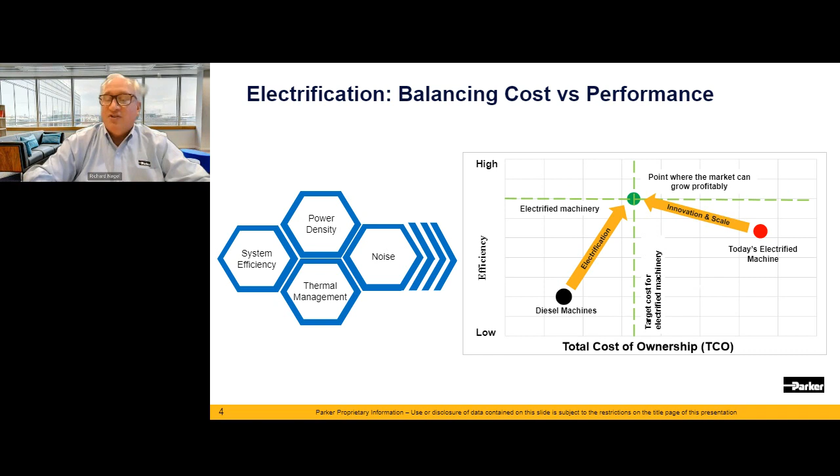And so one thing you'll find with these integrated products, they do require a certain amount of scale. They're not piecemeal like typical hydraulic systems where you can take out a valve and put in another one. They are a little bit more on the automotive side where you require a certain level of scale to get the cost down. But that's where we're going to have to go as an industry to make this equation work.

So when we talk about fluid power technologies, for the folks here who have a hydraulic background, I think we have a pretty good understanding about the potentials and benefits of fluid power technology. In electrification specifically, we are helping to support carbon-free, carbon-reduced policies, local and regional emission regulations, which of course vary all over the world and all over North America. We're seeing lower noise regulations, especially in big cities and driven by municipalities. And once again, a requirement for smaller, faster, and more efficient hydraulic products and electromechanical products that are part of the overall system.

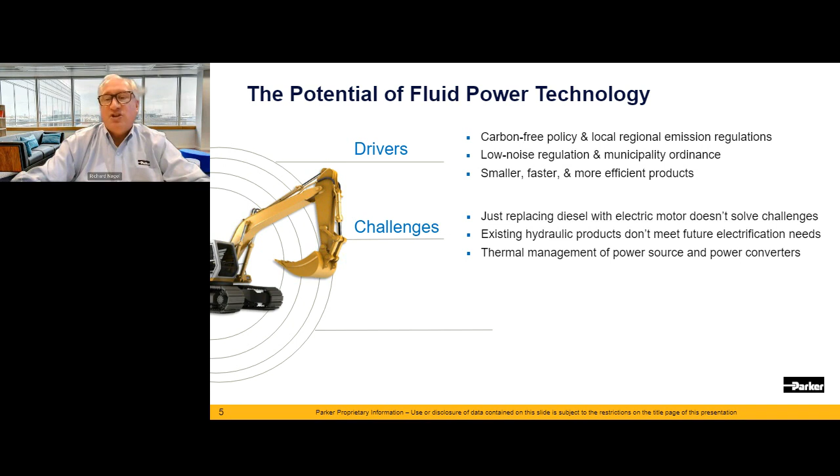Of course, some of the challenges, we like to tell people all the time, just getting rid of the diesel engine and replacing it with an electric motor doesn't solve all the challenges. It creates some different challenges, and we'll talk a little bit about that. A lot of our existing hydraulic products that have worked just fine for years in traditional mobile environments are not going to work or be ideal for future electrification. We'll talk a little bit about that. And then once again, the thermal management of the systems and reducing inefficiencies is key.

And then lastly, some of the potentials. So this opens up really the design playbook for higher speed, more power dense hydraulic products that utilize new designs and absolutely more automation on the manufacturing side. Modular integrated products that are more cost effective with manufacturing scale. So that's the supply chain and the automation assembly process. And then of course, digital, right? That just permeates everything we do today.

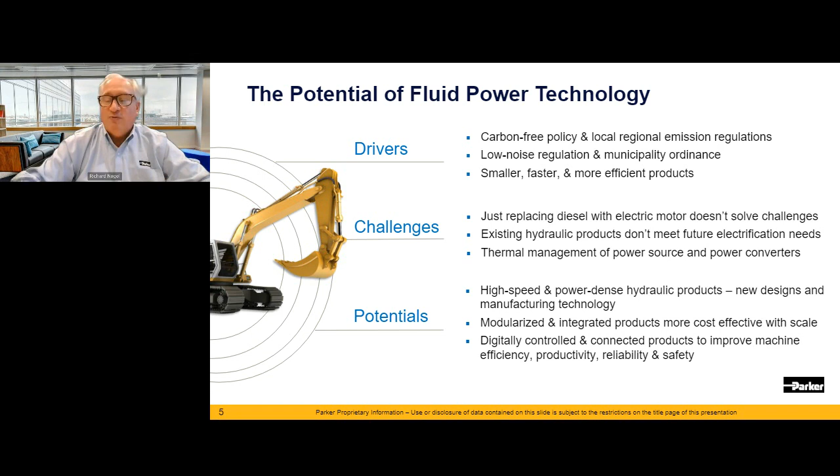Having connected products, how does that improve efficiency, productivity, and of course, very importantly, safety. So we won't talk a lot about safety, but that's kind of the underpinning of a lot of what we do for electrification with hydraulics.

So why electrification? Why now? Big hot button topic for a couple of years. Anybody who's been to ConExpo or BAUMA, you see electrification everywhere. Shows are sold out, ACT shows. So, number one driver, we have customer demands. And at the end of the day, we have to provide reliable solutions for fleets and municipalities so they can make money, because ultimately they have to operate this equipment in a way that is profitable long-term.

The other customer demands are extended battery operation. We're not battery people, but we produce the products that consume a lot of the power from the battery. So it's important that we have efficient products. Charging infrastructure in remote locations, construction sites, that's a huge customer demand, kind of beyond the scope of what we're talking about here. And of course, there's just changing attitudes about EVs, both good and bad, as people become more experienced, see what they can do and see what they can't do.

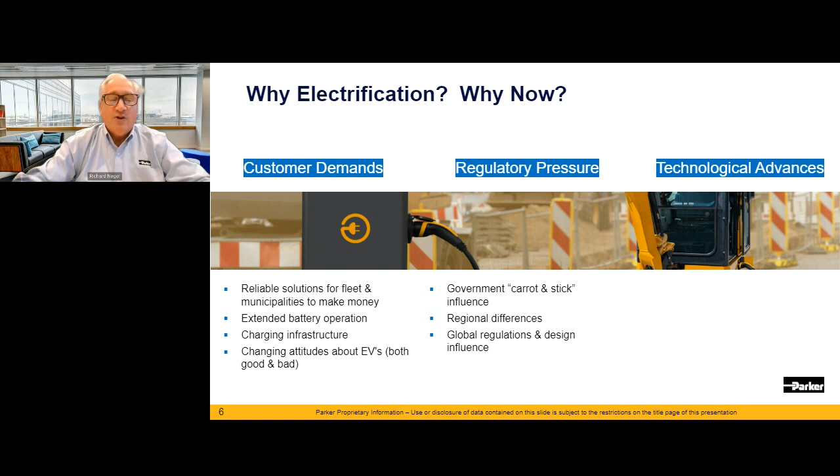Of course, on the regulatory side, we have a lot of government carrot and stick programs, right? Incentives and disincentives. We see a lot of regional differences, state to state. And then, of course, globally, as our industries are very global at this point, we see a lot of direction from Asia, Europe, that find their way to North America, and we're trying to find a place of equilibrium.

And then technologically, a lot of it is in the electronic side and controls. Power electronics become denser, higher voltages, higher current capacities, a lot more computing power everywhere, connectivity and data, IoT cloud solutions, autonomous operations, which is kind of beyond our scope, but part of electrification. The IoT solutions with over-the-air software, right? So that we can not only pull information, but push, and just more by-wire solutions, whether that's just operating a boom, a brake system, or a steering system. We're seeing more and more decoupling from cables and just pumps and valves, but using control systems.

So, some of our challenges for hydraulic systems are pretty clear. I wouldn't say the number one, but maybe one of the top issues we see here is our pumps today were designed for traditional diesel applications or power takeoffs or industrial, and RPMs were not the problem. Generally, we could go up to 2,500 or maybe 3,500, and that was fine for most hydraulic system engineers. But when you look at the motors that we have available today for electrification, they're operating in the sweet spot of 8,000 RPM and higher. And so we have a mismatch.

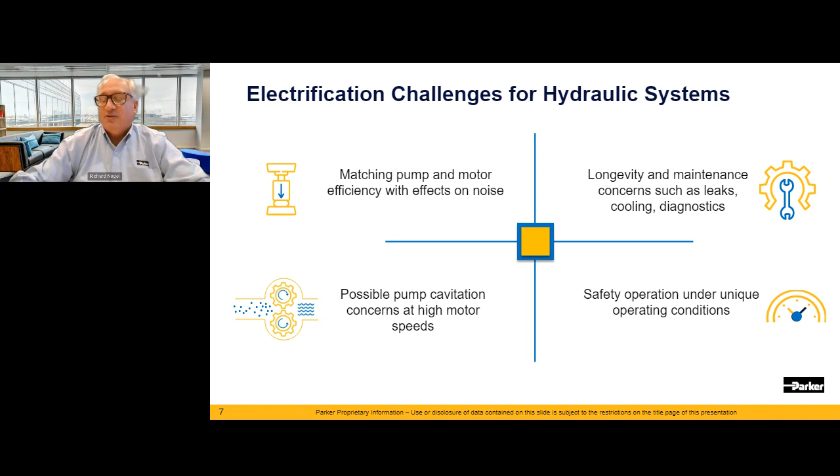And of course, longevity, the way we operate pumps in electrified systems is different than we see in diesel. So there are longevity concerns. And of course, all the normal hydraulic concerns, leaks, cooling, getting good diagnostics. Another side of this is, when we run the pump at higher speeds, we have to be concerned with cavitation and inlet conditions. And then we have a lot of unique conditions in electrification governed by a lot of different ISO requirements, but also good hydraulic practice. So safety is always paramount in system design.

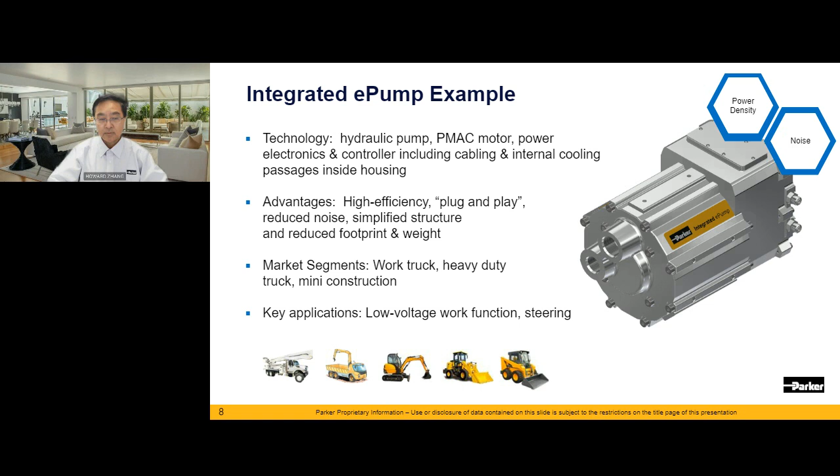So what is the integrated ePump and how has it been put together? You can see from this picture, on the left-hand side are the inverters or controllers. In the middle is actually the motor. The motor basically has the key components: the rotor, stator, and housing. On the right-hand side, it's actually a fully integrated hydraulic pump. And it can be different pumps there actually. So that's the structure.

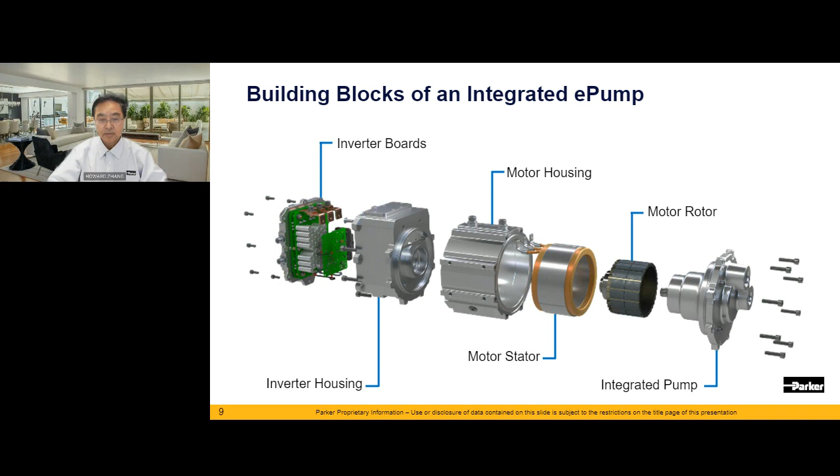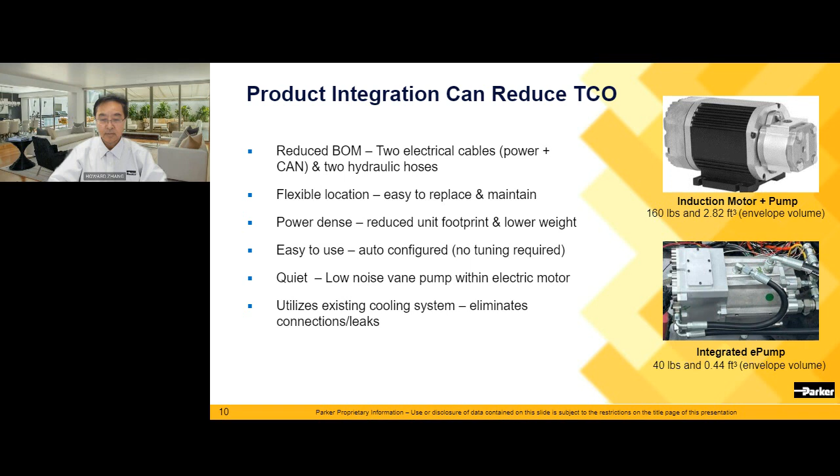And the other major benefit for the OEM is flexibility. They can put this thing anywhere they want, rather than just on a particular space with special mounting. And also, it's actually easy to use. It's auto-configured and auto-tuned, so no tuning is required on site. And if you design it properly, it's actually quiet. We proved that can be done. It's actually quieter than when you bolt this big motor and the pump together. So that's the simple benefit.

And the other part we're going to talk about is the mismatch Rich just mentioned between the hydraulic pump and the electrical motor. You can see from this graph, the vertical axis is input torque, or pressure in hydraulic terms, and the horizontal axis is the operating speed. For a normal existing hydraulic pump, the peak efficiency region in this example is between 1200 RPM and 2700 RPM. And the efficiency is pretty good in terms of a hydraulic pump.

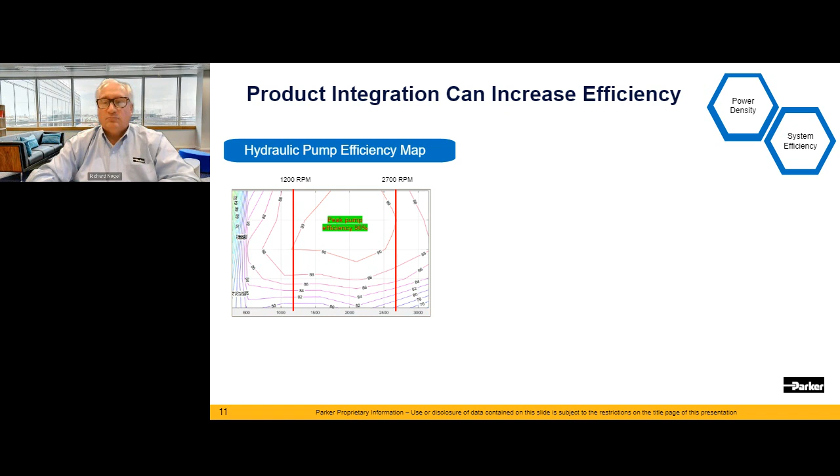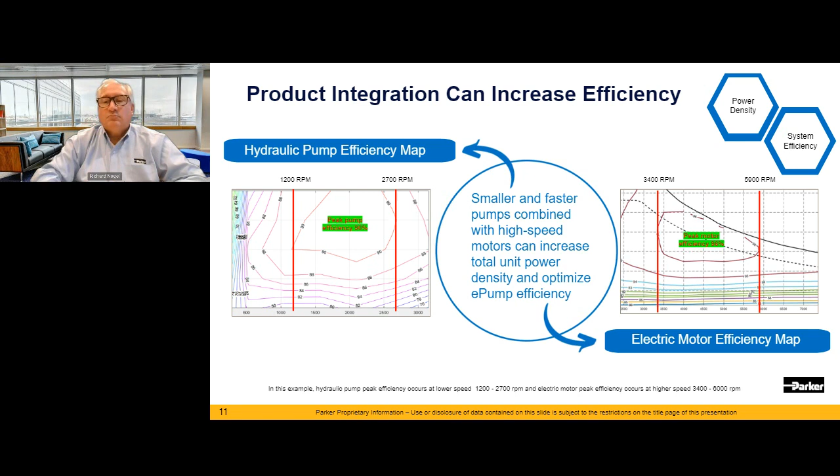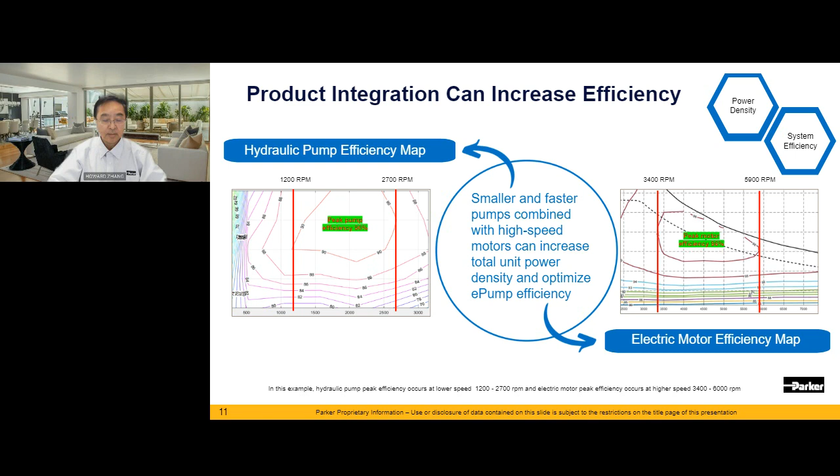However, if you look at the electrical motor on the right-hand side, the most efficient operating range is actually double or more, beyond the hydraulic pump operating range. This one is 3,400 RPM to almost 6,000 RPM. So there's a mismatch. To solve that, a smaller and faster pump technology needs to be combined with this high-speed electric motor, which can definitely increase the total unit power density. And at the same time, if you move the efficiency range of the pump towards higher speed, you can optimize the ePump efficiency. So that's another benefit.

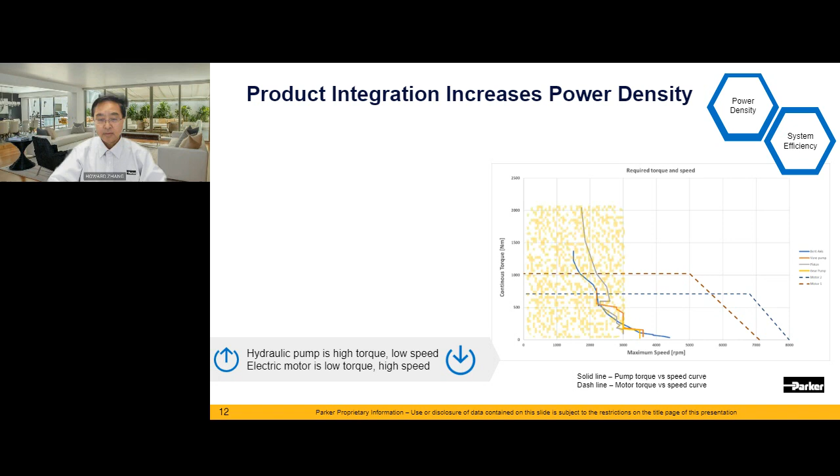This can be further illustrated by this generic graph. The solid line is the hydraulic pump. The vertical axis is continuous torque or hydraulic pressure, and the horizontal axis is speed. Hydraulic pumps have very high torque, but their operating speed range is low, in this case 3,000 RPM or less. But it's a different story for the electrical motor. Their most efficient point is beyond 3,000, from 4,000 to 6,000, as the last example showed. And they can run at much higher speed.

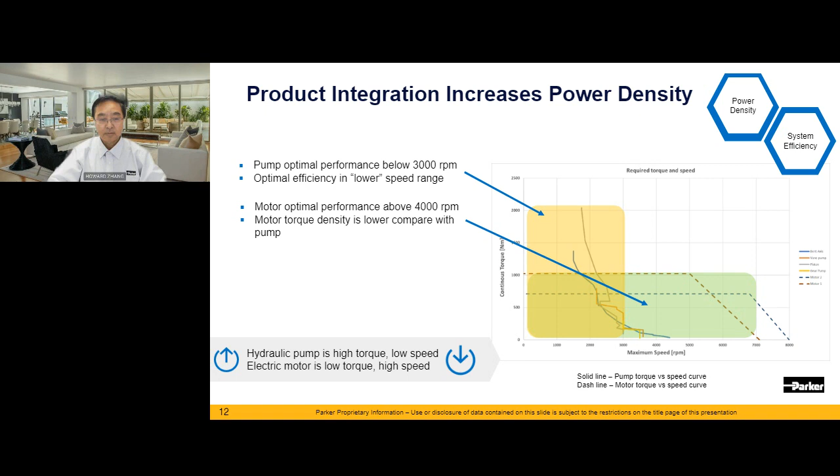So to match the hydraulic pump with a motor, we need to do something. One is to use a smaller and faster pump and integrate it with the motor to increase the power density. And if you do that right, it also increases the efficiency. The other, people can say, okay, you can use a gear. Sure, you can, but with added inefficiency and also cost.

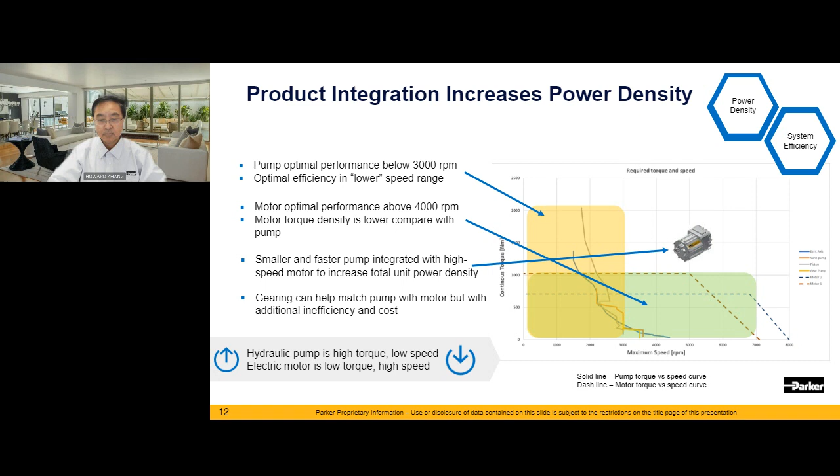So we talked about how we can increase the power density of this ePump and what that will do to the efficiency of the total unit. And to improve efficiency of the system, reduce the battery size or make the battery run longer, improvement on the component only will not do the job. We need to take the total system point of view.

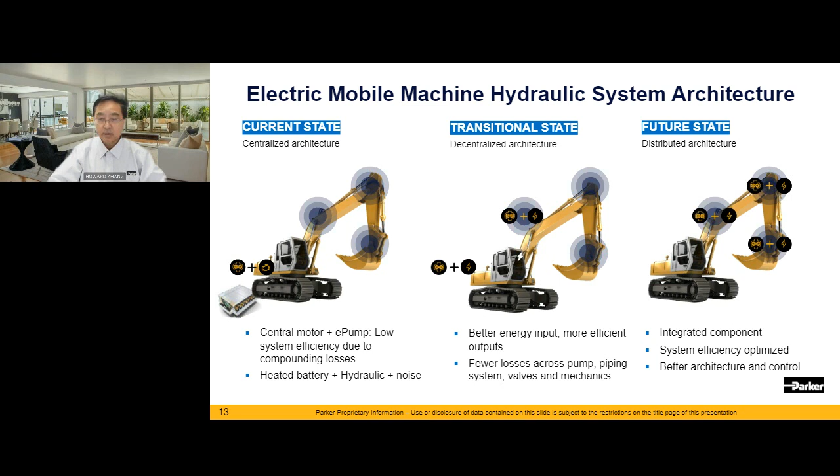As we see, the centralized system architecture is you have a battery, and the battery has power. You have an inverter and the electrical motor. A big electrical motor drives a single pump. In this case, I actually use a gear pump as an example because your motor can vary speed, varying the flow, but you can also use a variable pump here. I just use the fixed pump as an example.

But the speed of the actuation or implement is regulated by the centralized valve. They call it a valve bank. And the good part is you can maintain all the hydraulic portion untouched. So that's a good part. But from this top picture, you can see it's very inefficient. You have 55% valve loss of the total; 55% of the input power is lost or wasted by the valve throttling.

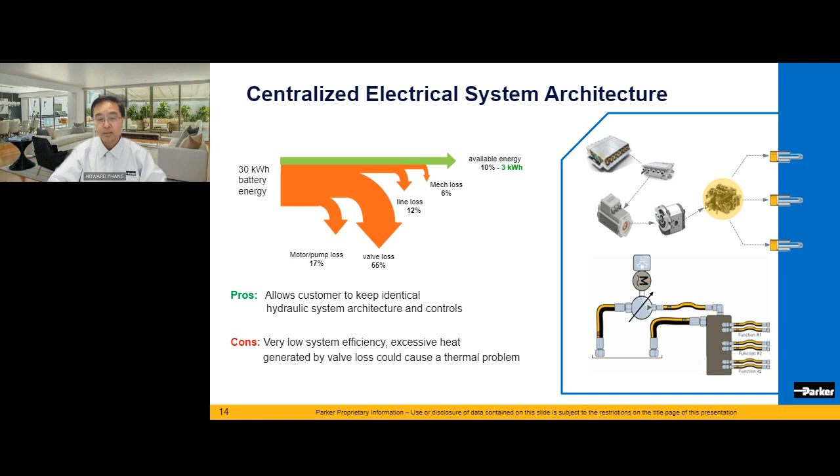And again, your motor and pump loss is also significant. You only have, in this case, 10% of your energy to do the work. So you can see the battery will have a hard time, your system will have a hard time to maintain the temperature, or they have a thermal issue.

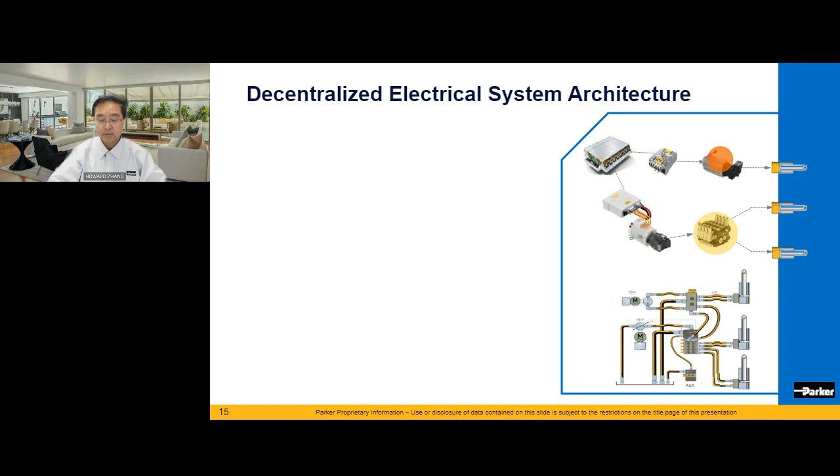And the next one is decentralized, we call that a transition state. So you can see in this system, you have a motor driving a pump. In this case, I use the variable pump. The other path is to use the pump together with the motor, a high efficiency pump and motor driving one function. So that's decentralized. And you can see the efficiency over the centralized system is actually quadrupled. It's a big difference. So by doing this, you definitely will save a lot of battery energy.

But still, you couldn't get the full benefit of this pump and motor pair. You still have a valve throttling loss, and you still have the idling loss, partial idling loss. The future system architecture, or the architecture mostly fitted for electrification, is this distributed electrical system architecture, because the pump and motor pair is very flexible, as I mentioned. You can put it anywhere.

And the benefit is you have a fully distributed system, in which you have maximized the system efficiency. The good part is you have a dedicated pump motor pair, which allows maximized system efficiency, and you have full power on demand with no throttling. So if one function does not need the power, you just basically turn it off.

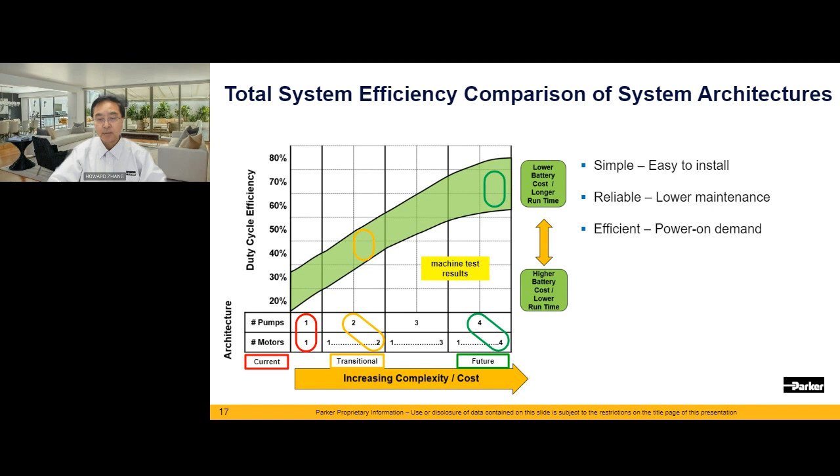So this one is actually a summary of the three system architecture comparison. You can see the red one is the centralized system. The middle, the yellow, is the decentralized, and the green is the distributed. So this is the efficiency comparison of the three. I'm not going to read the advantages of this distributed system architecture. You can see them here.

The other important part I need to mention is by doing that, you actually optimize the thermal management. And by optimizing thermal, you will have much less cooling need, and also your HVAC system can be quiet, or sometimes not used. Yeah, so that's an extra benefit.

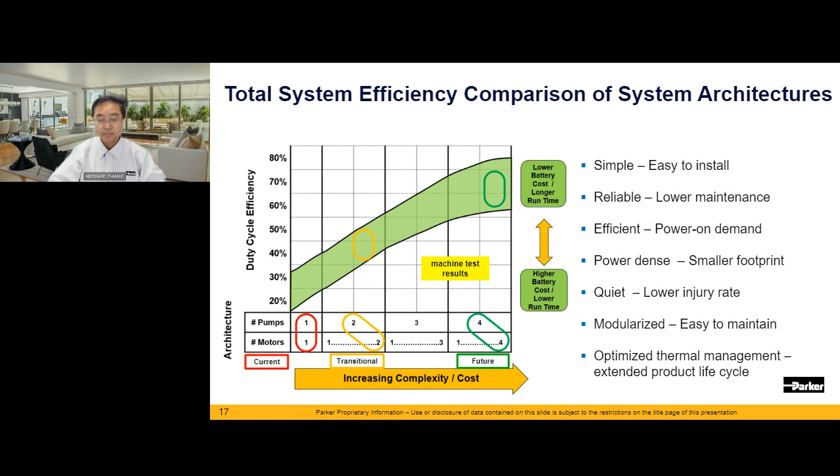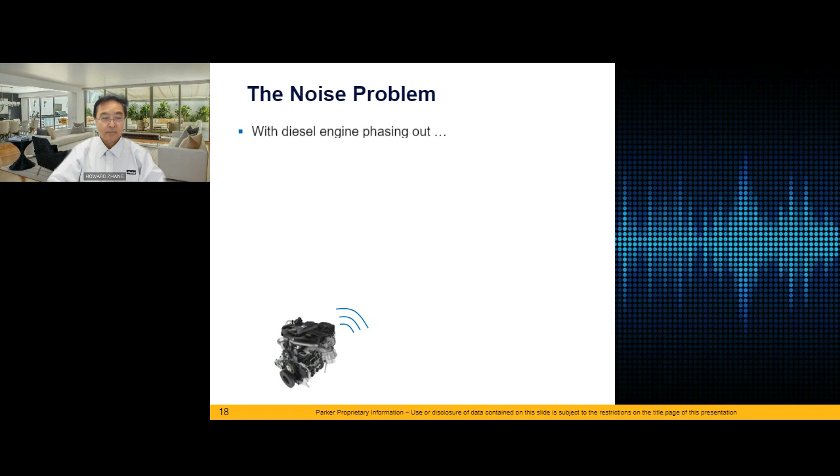So when we talk about this efficiency, how will that efficiency affect other parts of the electrification? Because the other important factor is noise. But why noise? Why do we say we have this noise issue or noise problem now, not before? It's all because you had this big boy there for a long time, and that big boy masked most, if not all, of the hydraulic noise until your diesel engine was phased out.

Now your hydraulic product, a hydraulic pump, is at the forefront of the machine operating noise. Everybody says, oh, your hydraulic pump is noisy. Why didn't they notice that before? Because there was a big engine, much noisier than the hydraulic pump. We will show that on the next page. But how important is low noise? It really depends on the market and on the application environment.

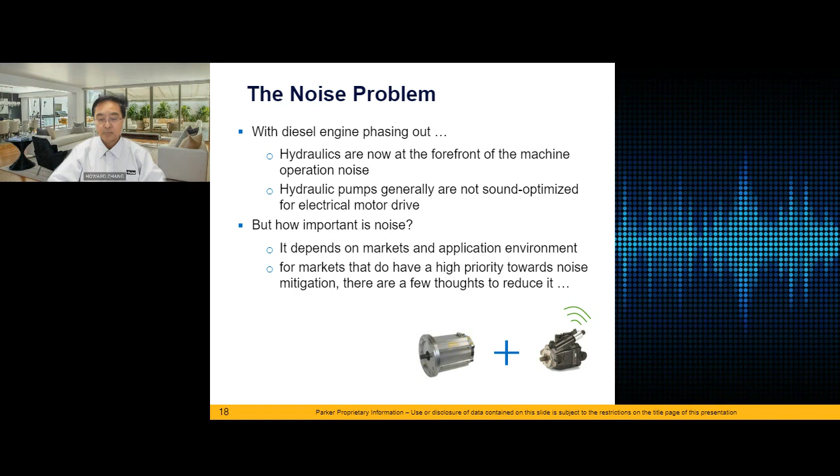For markets or applications that do have a high priority towards noise mitigation and reduction, there are a few thoughts to reduce it. So where did that noise come from? The noise actually depends on the pump technology, system technology, operating condition, and definitely the pump speed and pressure, and also the mounting, like how the pump and motor mount to the machine.

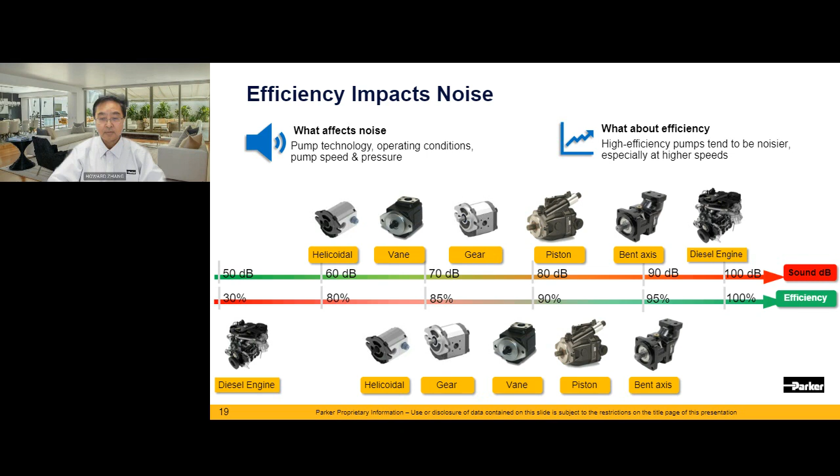All the manufacturers are actually developing new technologies to deal with the noise issue while still trying to maintain the high efficiency of a hydraulic fluid power product. There's a lot of new development going on, actually. For electrification, that's a very good thing. So then I'll hand over to Rich again.

All right. Thanks, Howard. So obviously, one of the takeaways here is not just the product concept of an integrated ePump, it's really about a distributed hydraulic system. It's not something we could do in the past, but now with the ability to have motors and drives integrated with pumps, we can actually do this and are doing this on machines. So what do we get out of these distributed systems? Obviously, efficiency is paramount with any electrified machine. We can turn this off when the function is not required, so the noise goes away, parasitic hydraulic losses go away, and we're not drawing down from the battery.

Ease of maintenance. We'll talk a little bit about data that comes out of the device, but these types of devices are not things that you necessarily try to troubleshoot and repair in the field. It typically is something that you replace, and you've got the tools to tell you what's going on based on the data. And the other outcome of being able to turn off and better efficiency is less battery drain. That's probably key, because the battery is such a huge cost here.

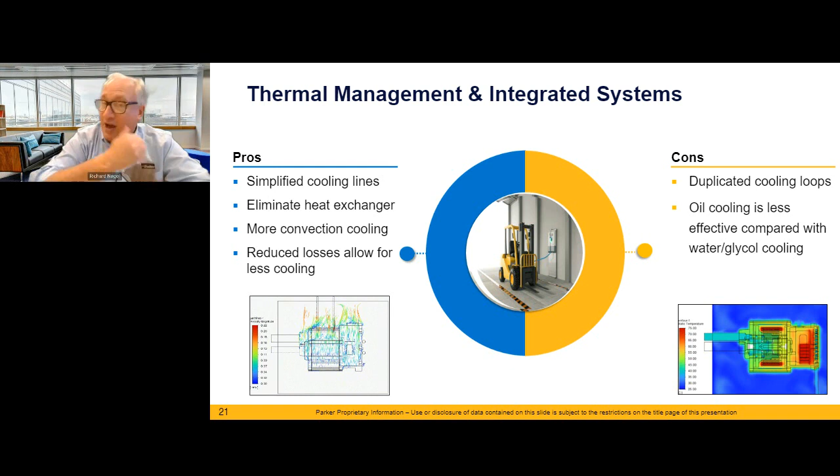The con is, with distributed products, you potentially have some duplication of cooling loops. The other thing is oil cooling is generally about 15% less efficient than water glycol. And of course, if you're going to have a battery and inverter, you're going to have a water glycol system to cool that. It's absolutely required.

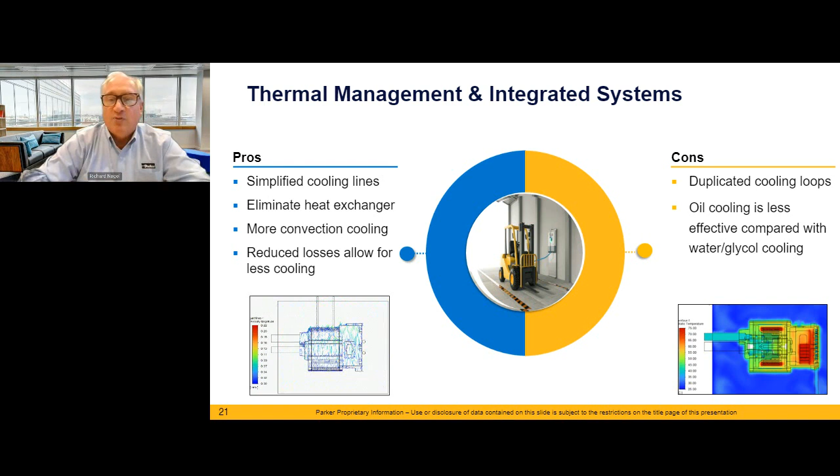Well, I mean, you can run it through hydraulics too, but typically not as efficient. So it really depends on the machine design. At the end of the day, though, having less inefficiency in the system allows you to have less cooling overall. So generally in the energy balance, it's going to be more favorable to have this type of an architecture.

So from a control standpoint, I like to tell people, when you look at these integrated products, each one of these is a node on the J1939 CAN bus. So you're getting information from the point of work. And some of the messaging that we get on the CAN, things like motor current, so you can see from motor current how much torque, and if you have a pressure sensor feeding back on the CAN, you can really start to do hydraulic horsepower versus battery power input, motor RPMs. You can start to think about RMS work, life cycles, all those things.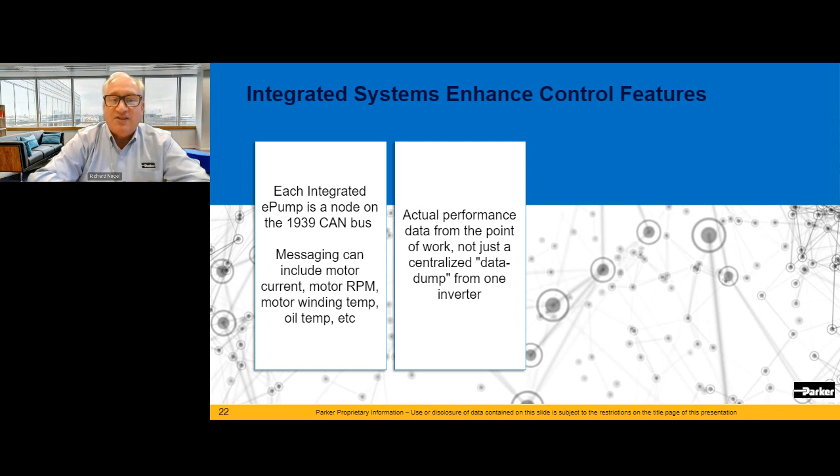We're also getting data on the motor winding temps and oil temp. So all that stuff is available on the CAN, and we can do a lot of different things with that data to help predict system health, troubleshoot, prognostics. And once again, we get performance from the point of work, not just in a traditional centralized system where we have one inverter, one motor. We actually can see what's going on at the work function. So if we have a problem at one point on the machine, we know exactly where it is. No troubleshooting is really required from that standpoint.

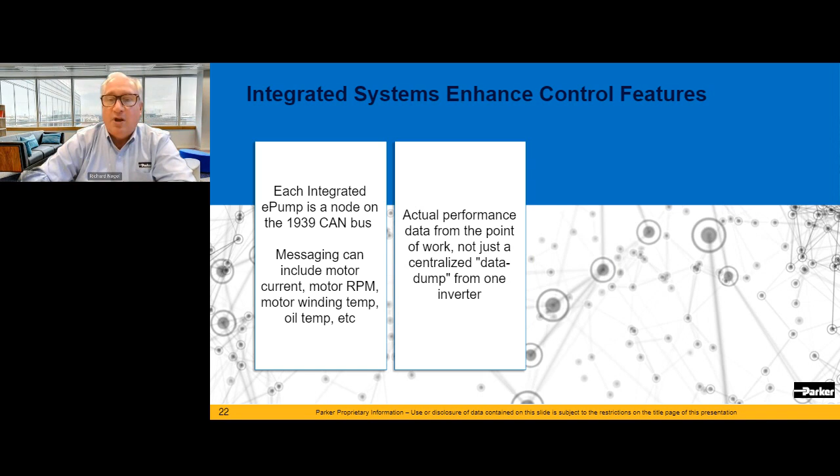Real-time data, so we don't get prognostics off the machine, but we do get good diagnostics. And so, for example, we can tell how much work is actually done versus power consumed from the battery. So in terms of optimization, we can really optimize the point of work here that we can't do with a centralized system.

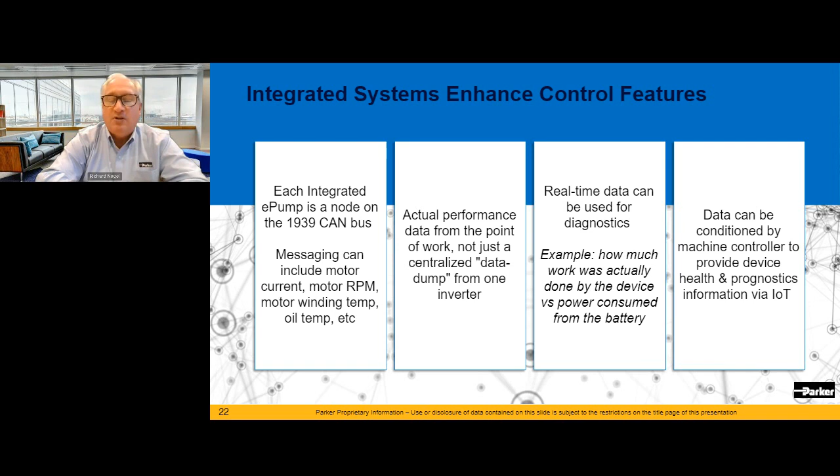And lastly, talked a little bit about IoT solutions, but when we have this much data on the bus, we can transmit that live. We can either run it through a machine controller and manipulate the data and get some real findings, or we can send that to the cloud and then pull that data down so the people actually operating the machines can look at what's going on.

I know in some cases we have IoT solutions on our electrified equipment, and we can look at any time and see how much work is being done, how efficient it is theoretically versus actual, and that data will help tell you if there's any degradation in the performance of the device. So if day one it consumes X power and provides this much work, and then a year later it's starting to diminish, we know that there's a problem with the device, probably has to be replaced in the field.

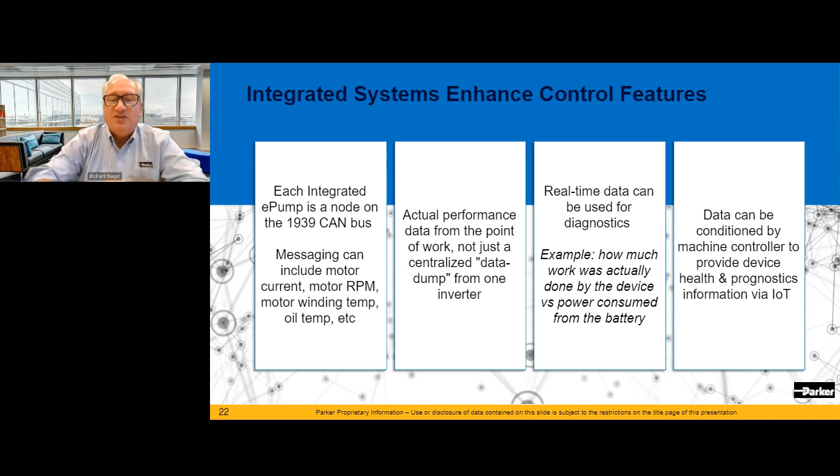So lastly, some takeaways, and then we'll have some time for Q&A. So from a market need standpoint, what we're trying to do as one of the suppliers in this industry is help develop more efficient fluid power systems that goes through from the motor to the drive, which are typically high efficiency, but any point of efficiency we can get helps. Fluid power systems, generally reducing losses through hoses, through fittings, slippage through pumps, right?

And then again, we talk about all these trade-offs. We need high efficiency pumps that can operate at higher speeds. We've got bent axis pumps today that are amazingly efficient throughout all speed ranges, but then they have a bit of a noise penalty at higher RPMs. And of course, we need to keep things reliable, and if not maintenance free, predictable maintenance, so that if we promise a 5-year life cycle, for example, the data can point and say, yeah, you're good, or you need to start thinking about replacement. And that's really the power of a lot of these IoT solutions.

So once again, from an industry standpoint, one of our focus areas are high-speed, low-noise hydraulic products. And there are a number of different technologies on the table. They all have their pros and cons. There are some endurance requirements in electrification that are actually different and more stringent. For example, we can accelerate a pump at a much higher speed or time to get to RPM than we can with a diesel engine. So that puts stress on the pump, on the housings, you name it.